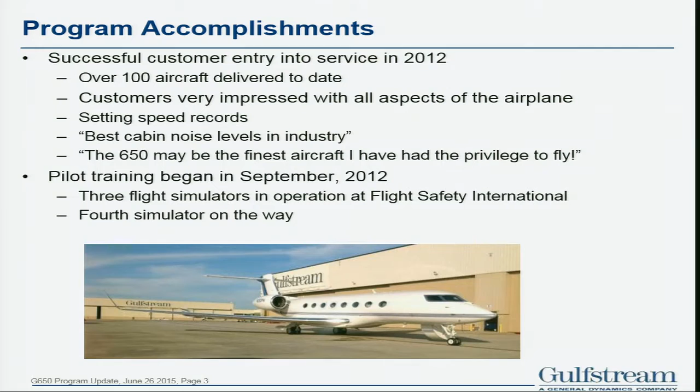Also, for pilot training, we worked with FlightSafety. We have 3 simulators already built. The 4th one's on the way, and actually we're looking at a 5th one now over in the UK. So quite a bit of action going on with simulated training for the 650.

So let's talk about the highlights of the airplane. Design: let me first say that Gulfstream itself has never built a new airplane. The last new TC airplane was built by Grumman Aerospace, called the G2. Every other airplane since the G2 has been a derivative of the G2, including the G5, the 550, the 450; they're all derivatives of the G2. So when we started the 650, this was the first new jet that Gulfstream itself had designed.

So our first rule was we're going to design the whole airplane in 3D in CATIA V5. And then we looked for the longest range airplane possible at highest speeds. So we looked at 7,000 miles at .85 and 6,000 miles at .90. Keep the empty weight of the airplane at 54,000 pounds, max takeoff weight of 100,000 pounds. And then we worked cabin noise. We wanted dB levels below 50, cruising at higher speeds. We'll talk about that later.

We got a provisional type cert in November of '11, and then we got our certification on September 7th of 2012. So we started delivering airplanes actually in November to customers that year. Field performance, the plane handles spectacularly. We'll talk about that a little bit. And one of the things we did when we decided to build this airplane is we wanted half the parts in this airplane that are in the 550. And we met that objective, which is pretty important.

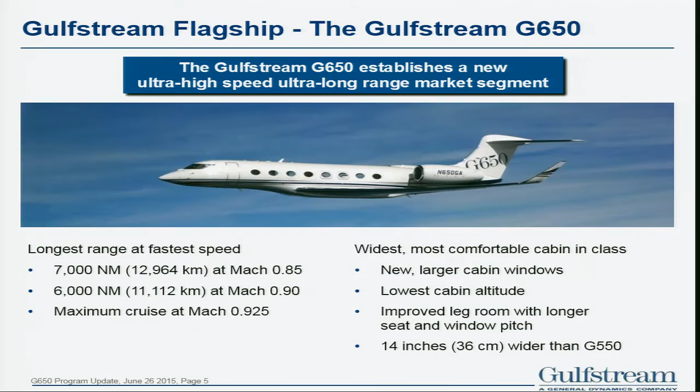In addition, we've pitched the windows out. We spread them out to give us more seat pitch. And then, first time ever, we've changed the fuselage at Gulfstream. We actually widened the fuselage 14 inches. So it was a big change for us there.

We refer to this as a walk-around chart, what we've done to the airplane. For the first time ever, we introduced a 3-axis fly-by-wire system with a fully electronic backup. We're the first business aircraft to certify a fully electronic backup system. Also, we put some more composites in the airplane. The horizontal is a drooped composite horizontal surface, spars and covers. We went with new engines. We picked a Rolls-Royce BR725, and I have a slide on engine development.

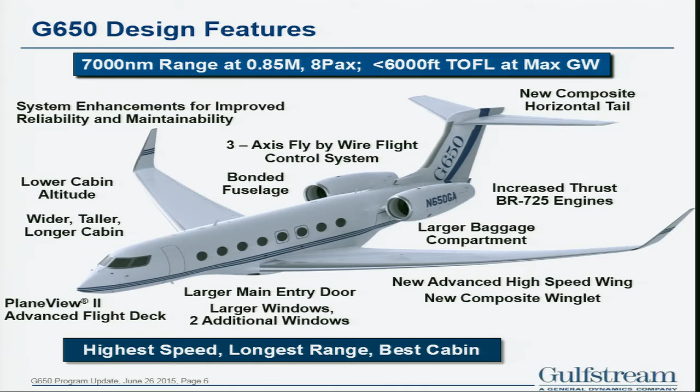We increased the baggage compartment size. We put a whole new wing on the airplane, a whole new cockpit, a whole new entry door. In general, we have basically a whole new airplane, but it didn't start this way when we got it out of PD. I hate to say that, but we changed everything on the airplane during development and didn't get any budget or any schedule as a result of that, which was kind of interesting, but challenging.

What is speed today? What does it mean to cruise between .80 and .85 on a long-range mission? It will save you an hour in the airplane. That's a big deal. We talk to customers all the time. Customers helped design this airplane. We got their feedback, and every one of them talks about speed. Speed is everything. And that's why, when we look at how they're using the airplane today, most customers are cruising at Mach .90.

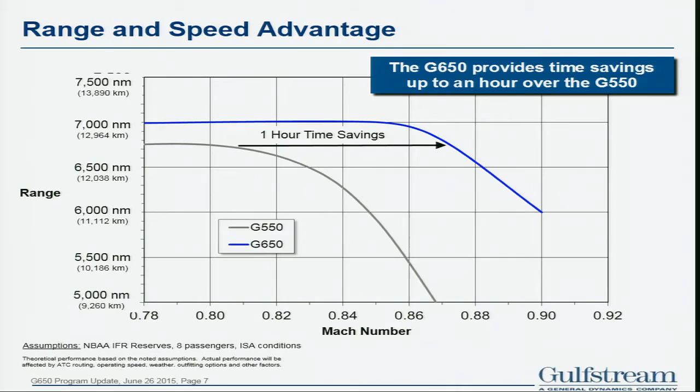Wind tunnels. We spent a lot of time in the wind tunnel, and we went to 9 different tunnels. We spent over 1,400 hours validating the design, the performance, and the handling characteristics of the airplane. We went all over, from Boeing to ETW and NASA, over to the Netherlands, over to Germany for the cryo testing.

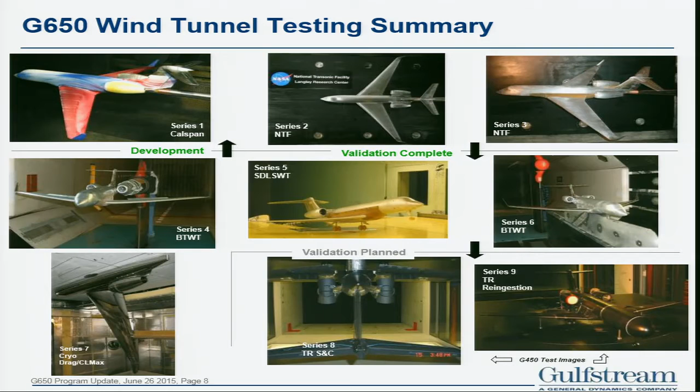Quite a bit of testing was done. The highlight of this is we also performed a lot of CFD on this airplane, thousands of hours in CFD. And what's amazing, what we learned is the engineers did a great job. The CFD predictions matched what was in the tunnel. There was nothing there that was different, which was a tribute to the engineering. I mean, it was amazing how close the CFD matched the wind tunnel testing.

And here's just a little breakdown of what each test was, and if you want to ask questions, we can talk about those, but this is what we did in each wind tunnel. On the G5, though, we did spend almost 1,600 hours in the tunnel. So you can see we spent a little less time than the G5, but we got great results.

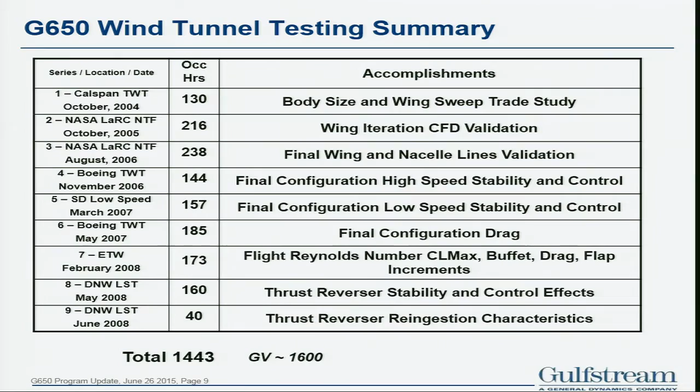Talk about the airplane systems. In Savannah, we have 14,000 people now working for Gulfstream. We've built a campus for engineering. Basically, we have 4 research design centers. We have labs. There's about 1,200 engineers in these labs doing design of the new products.

We also built an acoustic chamber. Interestingly enough, that was critical for us to get our cabin noise down. And to support that, we have a great parent company called General Dynamics. We did hire some of the acoustic engineers from the submarine division. As you know, they're very acute for noise, so we hired them, and we learned an awful lot about the cabin. Well, I'll show you a cabin slide.

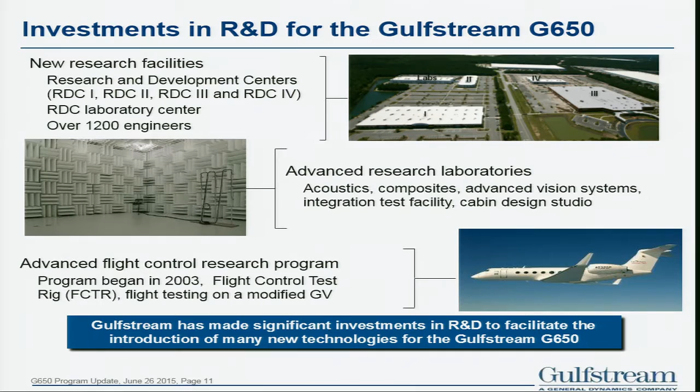So since we've never done fly-by-wire in Savannah, we also built a demonstrator airplane and put a fly-by-wire system in it. And we flew around for about 2 years experimenting with fly-by-wire so we can get familiar with certifying an airplane with fly-by-wire.

The engines, Rolls-Royce engines, 16,900 pounds of thrust, a lot more takeoff thrust than we had on the 550. It's very fuel efficient. It's got a good carbon footprint. The NOx levels are much lower. It's much quieter. Its flyover noise is half the flyover noise of a 550, to give you an idea on the 650 on community flyover noise.

So Rolls, I have to say, did an outstanding job. They beat the SFC guarantee that they signed up for, and the engines each came in 100 pounds underweight. So my hat off to Rolls-Royce in that program, they did an outstanding job developing that engine.

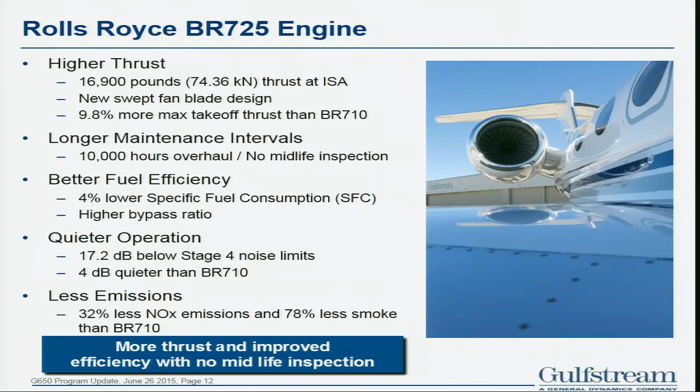The cockpit, we have PlaneView 2 in this airplane. Basically, we have 4 screens, 14-inch DU displays up front. It has EVS and synthetic vision, which are standard with the heads-up display. We put in a multifunctional standby controller, which is your standby instrument, but it also can be used for other commands inside the cockpit. So that's a first for us.

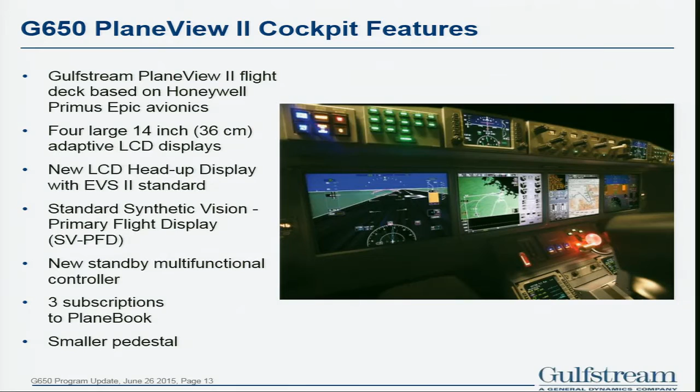And then, of course, we don't have manuals at all in the airplane. Everything's done through PlaneBook. We give 3 in the airplane. They have power outlets. And as a result of fly-by-wire, the pedestal was greatly reduced inside the airplane, giving more room to the pilots. Here's a picture of the cockpit today. You can see the HUD, the 4 displays.

Talk about enhanced vision systems. With EVS, it allows us to see through small particles of fog and rain. We can make a decision at 100 feet. And interestingly, you notice the bump on the upper nose of the 650, and on the 550 and 450, the bumps are on the bottom of the airplane where we have the EVS. It's not there because of parallax.

The bump was put on the top of the 650 because when you hit a cruise speed of about Mach 0.90, you get a shock wave if the bump was on the bottom, and it would hit the landing gear doors. So when we originally started with this airplane, that bump was on the bottom, but when we went in the wind tunnel and saw the speeds we were seeing, we moved it back up top because we were getting a big bump on the landing gear doors. So anyway, the drag rise was huge.

In addition, we have HUD. The HUD's a pretty neat system. It comes down, we have all the instruments on it, and then the EVS system display is displayed on the HUD, and it's also displayed on the DU, so the pilots see both.

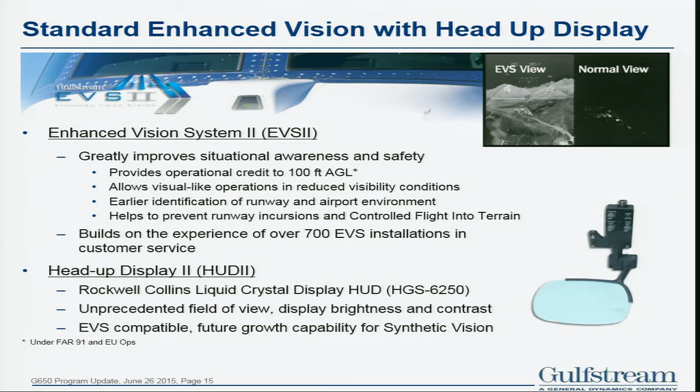As we go through development, and software is driving basically everything in the airplane today, we built what we call an integrated test facility. It's a stationary simulator where we take all the components and software coming in from the various suppliers, from the flight control computer from Thales, the cockpit from Honeywell, to the REUs from Parker Aerospace, and we integrate that in. It's a motionless simulator, and we can do all the software integration there at Gulfstream, and that is called our integrated test facility.

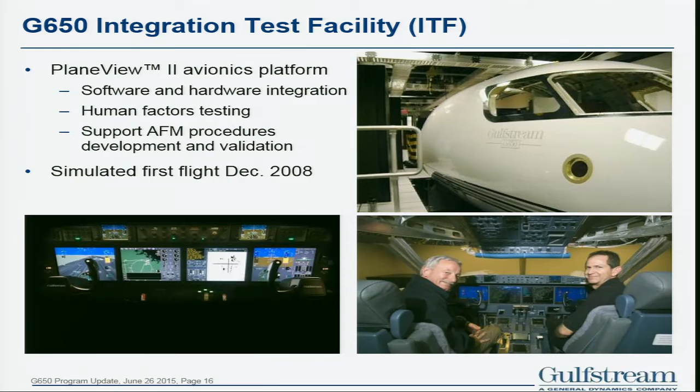Talk about the flight control system. We spent a lot of time on it, and to us it was the highest risk on the whole development side of the program. It turned out much better than we wanted, but we spent a lot of time and focus on it. When the FAA flew it during development testing and certification, we had to go into full electrical

backup mode, and the pilot, Clark, he's retired, but he came back and said he didn't even know he was in backup mode. It felt like he had full authority like he was in normal mode. So the flight control system went extremely well during this development program.

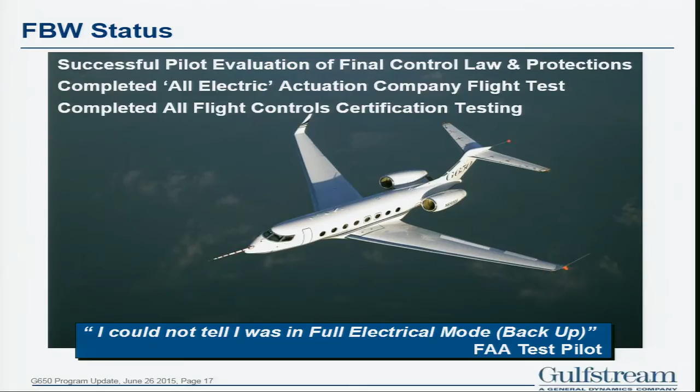So this is what we use to integrate and validate the fly-by-wire system. We spent literally about 20,000 hours on the Iron Bird before we got certification.

So what are the benefits of fly-by-wire? Because when we originally started the 650, from the day we started in May, it was not a fly-by-wire airplane. As we got through the regulations, we looked at what we had to change to go to fly-by-wire. But what were the benefits as we went into it?

Obviously, handling qualities. You can tune the system. We tune the airplane basically to the owner's seat, so he has the smoothest ride in the airplane. You can actually tune the controls to do that, for gust loads. It keeps you out of areas, it has envelope protection, which is fantastic.

From maintainability, when we want to rig the flight controls, we push one button and it does an auto rig based on the sensors. And it does have a marginal weight savings. You get into back and forth because you've got to put a RAT in the airplane and you have to put battery backup. But it does have a marginal weight savings.

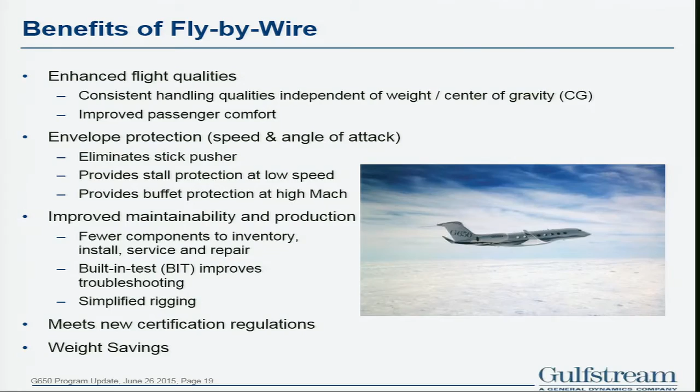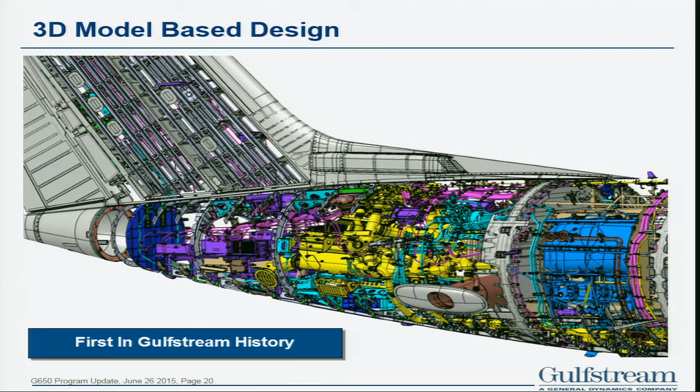Like I've told you, we changed the fuselage for the first time. We did it in three-dimensional CATIA V5. To be frank, we made our senior managers at Gulfstream very nervous. This was a quantum leap for us. So what we did was, from a manufacturing standpoint, we built the test barrel section. And that's a picture of it right there.

And when we looked at building this airplane, not only did we want half the parts, we wanted to build it in half the time it took to build the 550. So we made a significant investment in how we incorporated manufacturing technologies. We used bonded panels with stringers for the first time for us at Gulfstream.

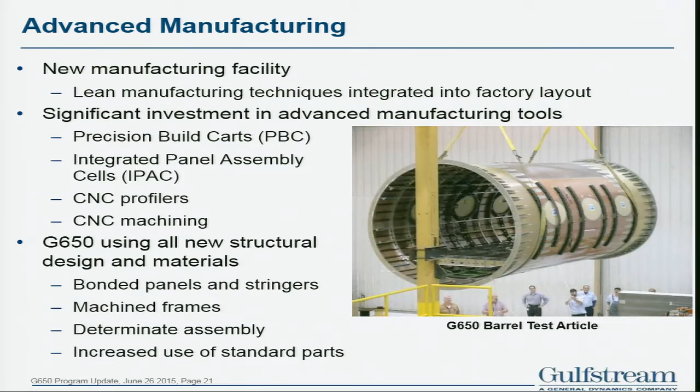Never did that before. We used the design method called determinate assembly, meaning in manufacturing they couldn't put a part in the wrong place. It had to fit perfectly, or it wouldn't go in. And then we took all the parts we had at Gulfstream to do with rivets and bolts, reduced the part count by about 50%, and they had to use standard parts throughout the build of the airplane. So it was a big success. And then we actually did a pressure test on this vessel, and it worked very well.

We also prototyped the nose. This nose we built way ahead of the first airplane. And this nose went in the ITF that I showed you a picture of earlier, and it went very, very well. Once again, to validate the manufacturing technology and the engineering design in 3D.

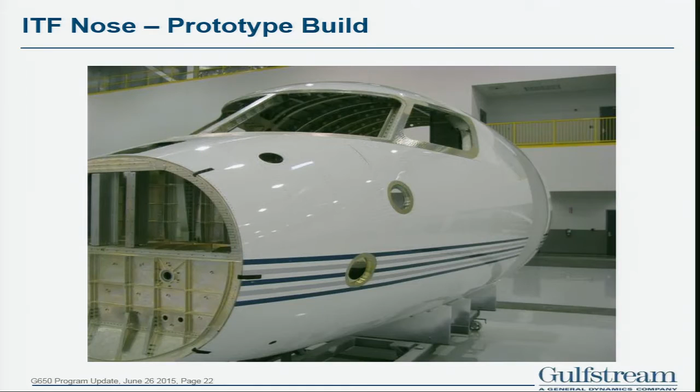Our manufacturing facility, the 650 manufacturing facility, got the code name Building X during development. It's now called the Nick Chabraja 650 Manufacturing Center. And it is the building, you'll see, that's kind of cocked a little bit to the side.

Let me tell you how things go when you develop a program. That building is not supposed to be crooked like that. It was originally straight. And although we received all the permits from the Savannah Airport and the FAA and everything, it turns out at the last minute they came back and told us, after we had almost started construction, that the tower could not see the end of the runway because the building was blocking it.

So we had to cock the building a little bit so the tower could see the end of the runway to the right. It's kind of a little last-minute thing, but thank God it worked out. We scrambled at the last minute to make that manufacturing center fit in that footprint.

Unique to Gulfstream, our wingspan from tip to tip is 100 feet. So we basically have almost a 50-foot panel on each side of the airplane. We do not splice our upper covers at Gulfstream, and the reason is when our owners and passengers look out their windows, they see the upper cover. It is one continuous piece of aluminum.

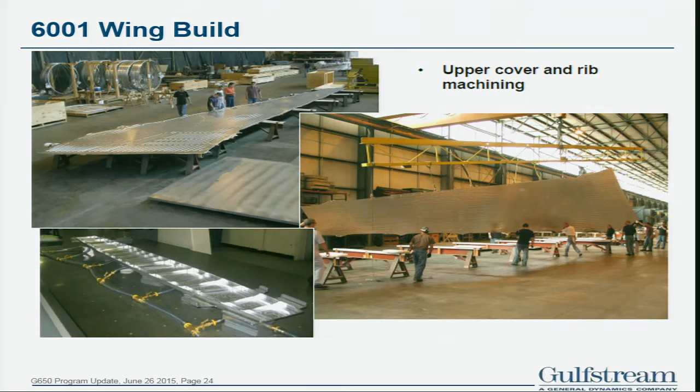It is the largest sheet that Alcoa makes, and you can see the size of it. The lower cover we do splice, but the upper covers on every Gulfstream from the G1 through the G6 all are one piece. So we took the limit and made a one-piece upper cover.

This is 6001's first bonded panel. It's made by Fokker over in the Netherlands in Papendrecht. And that's the Fokker team putting the panels together. You can see the bonded stringers. You can see the bonded doublers. The only thing that gets riveted on will be the frames, and we'll do that in Savannah. In the video, you see some pictures of that.

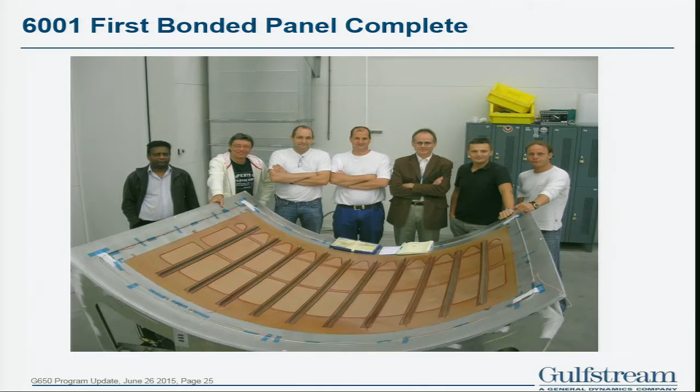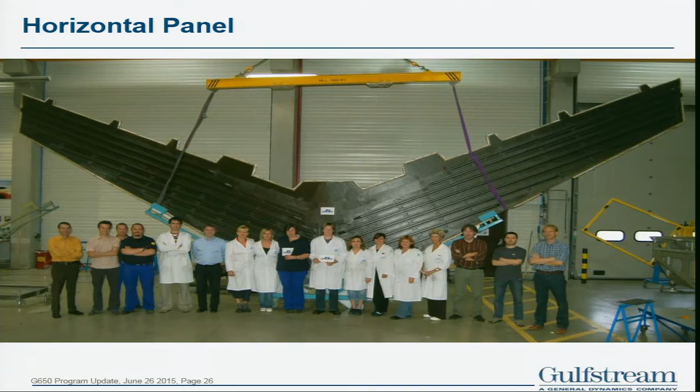And this is the horizontal skin. This is also made by Fokker. It's actually a joint venture with them in SABCA. It's made in Belgium. And it's been very, very efficient. It actually has a droop to it.

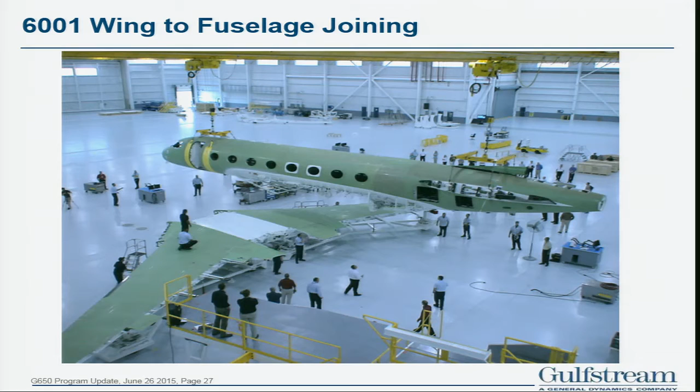6001, this is the first airplane. We call this T1, 6001. It's still in the Gulfstream livery. We use it in flight tests till today. Interestingly enough, this is the fuselage mating with the wing. We can mate this fuselage to the wing in less than 45 minutes. It has about 12 fasteners that attach the wing to the fuselage. It's still redundant, but doesn't take very long at all to mate the airplane together.

And then the tail comes on. The tail takes about 30 minutes to mount. The engines take about 20 minutes to mount. The landing gear takes about 25. It's like watching Legos go together. And most of that's attributed to the CATIA V5 and the Enovia systems that we worked in.

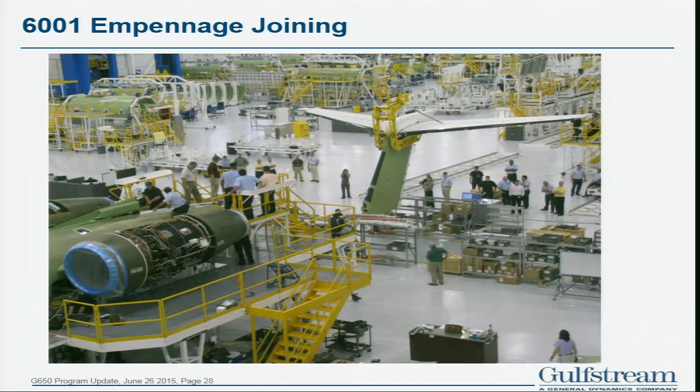And lastly, on our airplane, our leading edges on the 650 are different than any other Gulfstream we built. All the other leading edges we have, if you're all material people in here, the 450, 550, the G4 to G5, are all made with 2024 with a high polished clad surface. It's the number one warranty issue on those airplanes because our customers always polish their leading edges and the clad wears off and doesn't look good. So on the 650, we went to bare aluminum 6061-T6.

It's a softer aluminum. So this is an example of a bird strike test. We shoot the bird to make sure it doesn't penetrate the front spar and cause fuel leaks, and you can see the bird gun to the right there, and we shot the bird into the leading edge, and it worked out pretty well. We're pretty thankful.

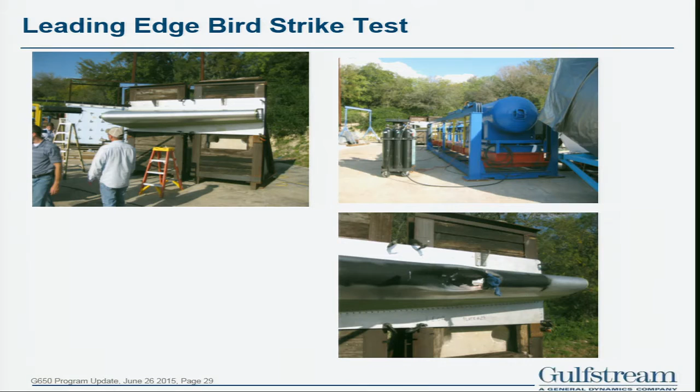We treated water, waste, lighting, power, and cabin entertainment all without a single point failure to a 10 to the -7 probability of failure. Pretty interesting to do. So what you end up doing is you have redundant systems. Like we have 2 water tanks, we have 2 lavatories, but we termed it Cabin Essential, and it's actually worked out pretty well.

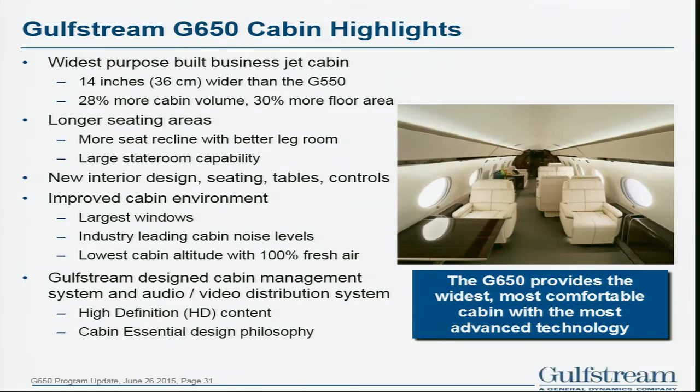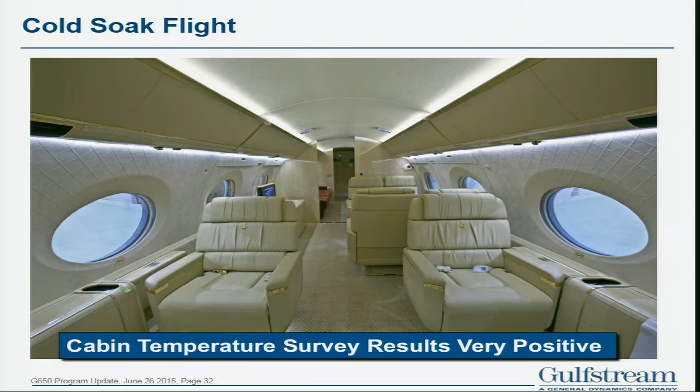Here's a picture of the cabin. On every green airplane and every completed airplane, we do what we call a cold soak flight. As you get up to about 48,000 feet, the temperature changes, and you sit up there for about 6 hours. Some funny things happen with expansion in the airplane. So we do cold soak flights, we do temperature surveys, we check for fits and gaps, and here's an example of an interior on a cold soak flight with positive results that we got back on the cabin temperatures too.

I talked about windows. We had the biggest windows in the industry on the 550 and the 450. We talked to our customers. Our customers said, we love windows, can you make them any bigger? And they also said, hey, listen, when I sit in my seat, I have to droop and look down out the window. I don't like drooping, can you raise the window up?

So you can see the biggest change, what we did on the 650. We raised the windows up 3.5 inches, made them bigger. And as everybody knows, when you put a big hole in an airplane, you have to reinforce it. It costs a lot of weight, and also to make the window bigger, these windows are not cheap either. So it worked out very well. Customers love the windows, the natural lighting that happens in the airplane.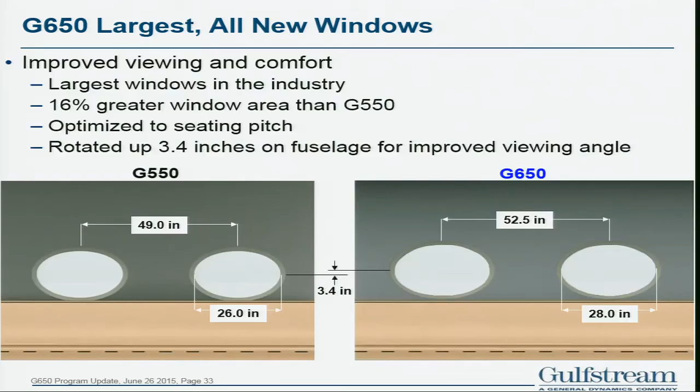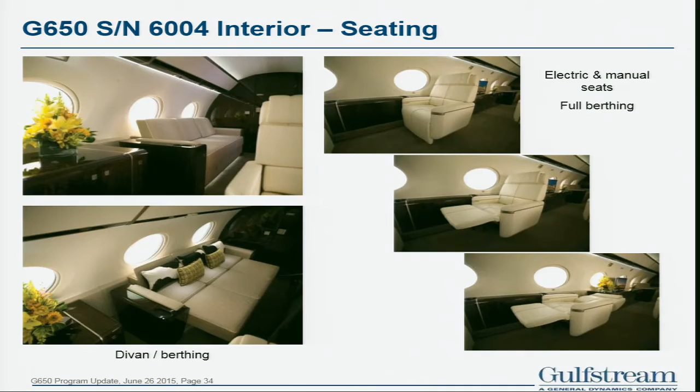Here's a picture of the seating. We have electric seats in the airplane, certified. It's the first in the industry for us. And then also you'll notice that everything fully berths. We have touch controls. We have an app you can load on your Droid or on your Apple. You can raise window shades, do your lighting, change your gasper.

Everything's touch screen inside. And like I said, you can take your own personal phone and load the app, and the owners and operators can come in the airplane and change anything they want in the airplane from lighting. They can change the color lighting. It's all integrated.

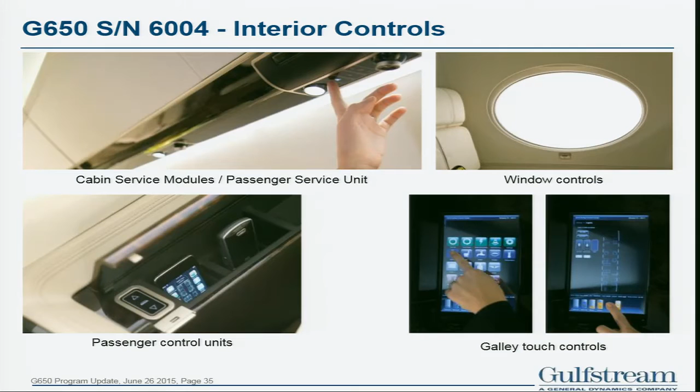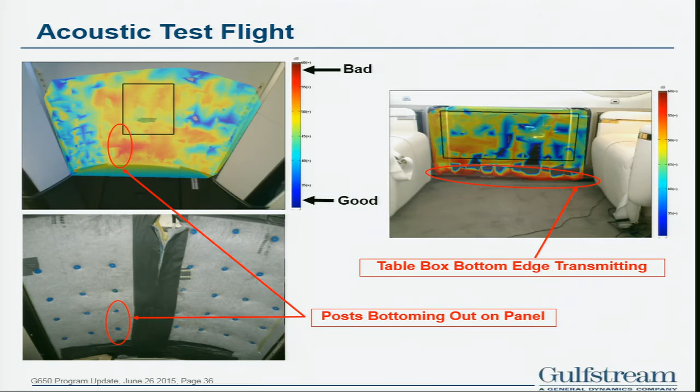So when we bring the plane down to the ground, we then take the panel back and see what's going on. And in this case, you can see we have the insulation, and we use these studs to hold the insulation up, and the stud was actually hitting the panel, causing the noise. And this one here is a table box. The table box also is the same thing. We noticed that it had some clashes inside that you wouldn't see normally. So we paid a lot of attention to acoustics in this airplane with insulation and noise.

The fun part, testing, always fun. Exciting, but from my perspective, it's the best part of the program. The only thing I will tell everybody, during development, you have a set schedule and time. When you get to testing and you find an issue, you have no time. It's 24/7, find a solution, get it back.

And although you think everything's going to go smooth, everybody's going to run into something that they got to tweak or do. So you can't let the asset sit on the ground for very long. You want to get in the air, but you want to operate safe. So even though it's fun, it does become a very stressful time for everybody. This is where you validate everything you worked on.

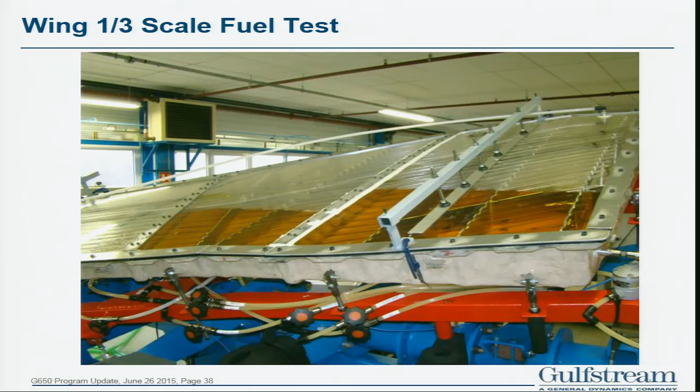So we also do lab testing. This is the wing. This is done in France, outside Paris, by a company, Intertechnique. Since it's the first time we've used their fuel system in Gulfstream, we actually built the third scale test article and did different altitudes and attitudes of flight to determine how the probes could read. So we did a little bit of testing there before we went and flew the airplane.

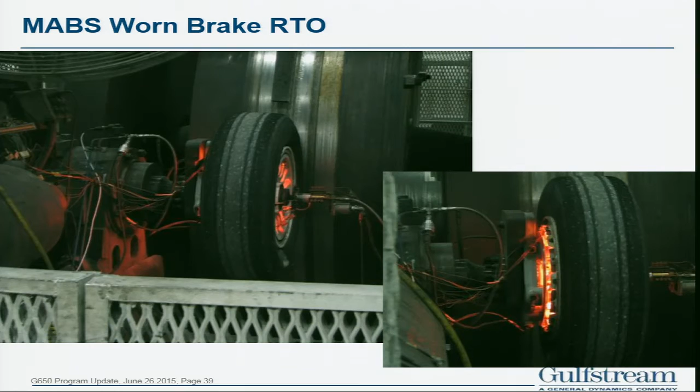Also MABS, aircraft braking system, up in Akron, Ohio. We do a lot of testing. This is their dyno test. We do a worn brake test, and you can see how hot the brakes get. You take it to the limit and determine the stopping distance and what temperatures the brakes can take. So that went very well too. And actually, we do a real test on the airplane in Roswell to do max kinetic energy braking.

Rolls-Royce, and this is in Dahlewitz, Germany, right outside Berlin. They built 5 test engines. You call them EDPs, engine development test engines. And we had them all over the United States. We had them all over Europe. We had them in England. They used 5 different test engines. Went very, very well. And you'll see some more engine stuff. But Rolls did an outstanding job with the development of test engines.

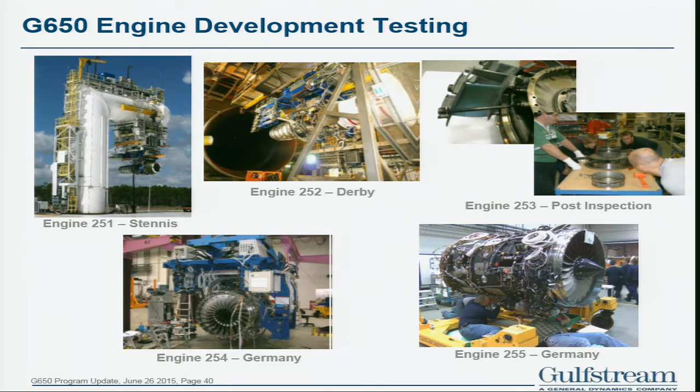All right, now, wing. The wing in the 650 is amazing. And I'll start by saying that I knew this statistic before we did this test, and this will make you nervous. 50% of all new wings break before they get to ultimate load. 1 out of every 2. It's pretty scary. So this is a nervous part of the program, and you're going to see how much this wing moves. And thank God we passed. Otherwise, we would have been in big trouble. So, 50% of all new wings do fail.

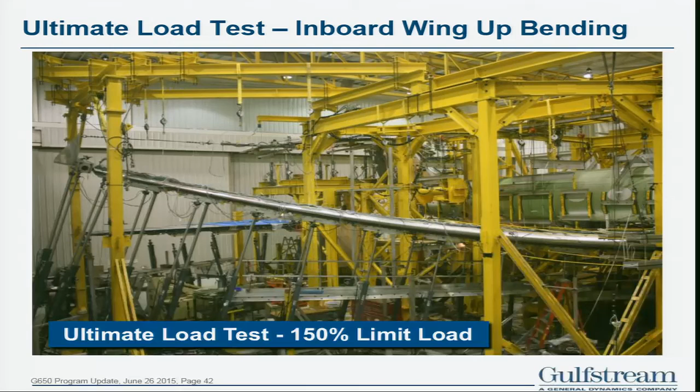It's a known statistic. We also have a fatigue article going on. It's actually right now being tested. We've passed 2 lives. We're going to 3 lives. The regs actually take you to 2.5, but Gulfstream, we're taking it to 3. And that is going on as we speak today. Should be done by the end of this year.

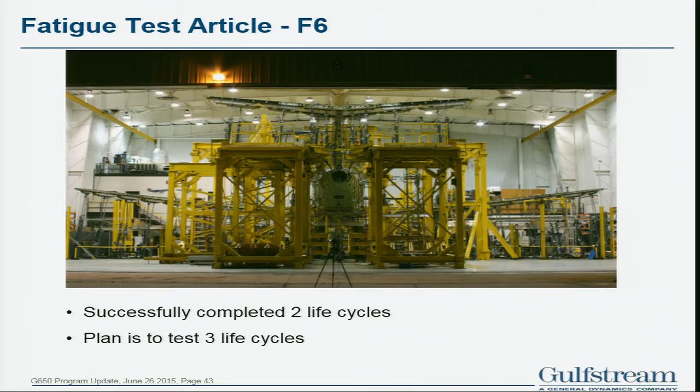And before we fly, we've got to do a lot of testing on the airplane. One of the first things we do is we call a GVT, ground vibrational test. Although we do a lot of modeling, and the engineers did a great job, the FAA still requires us to go ahead and do a GVT, and we want to do a GVT. And you can see we put shakers on the airplane, and we measure the vibration levels of the airplane.

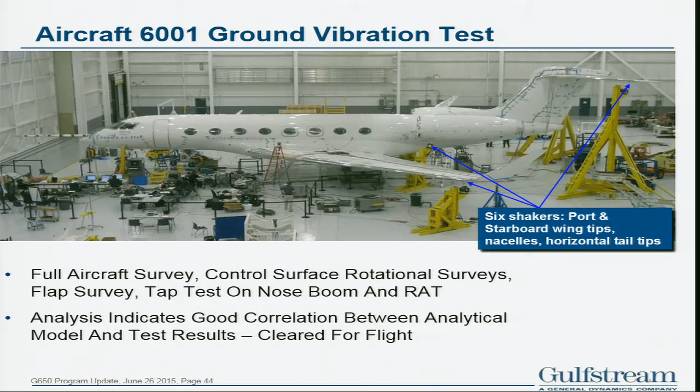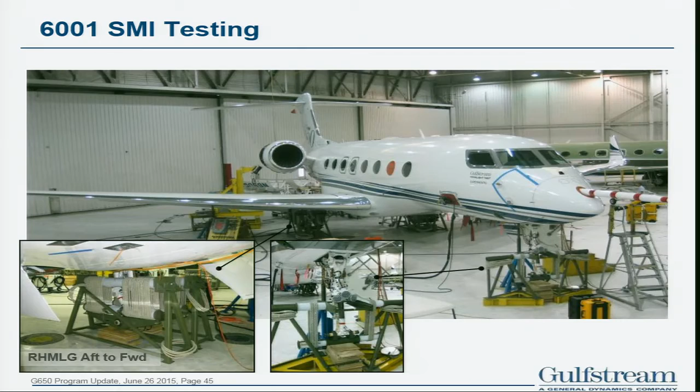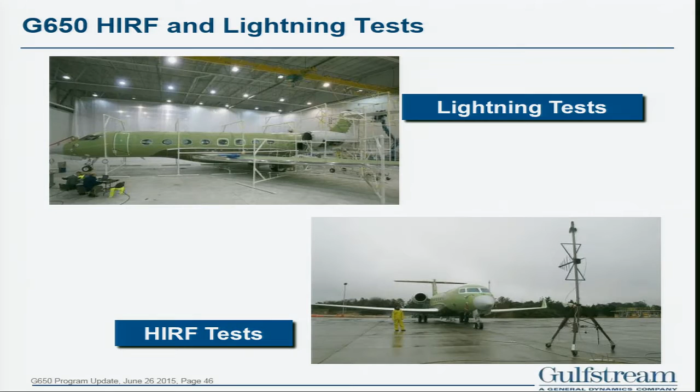Also, not only do a GVT, we do a structural mode interaction test too to see how the plane reacts in the structural modes. And you can see we put the plane on bungees, and we simulate the structural mode interaction of the airplane. Pretty exciting test. And on top of that, we do HIRF and lightning test. This is 6005, going through HIRF and lightning testing, validating the wiring, the systems, separation, and how the airplane handles HIRF and lightning.

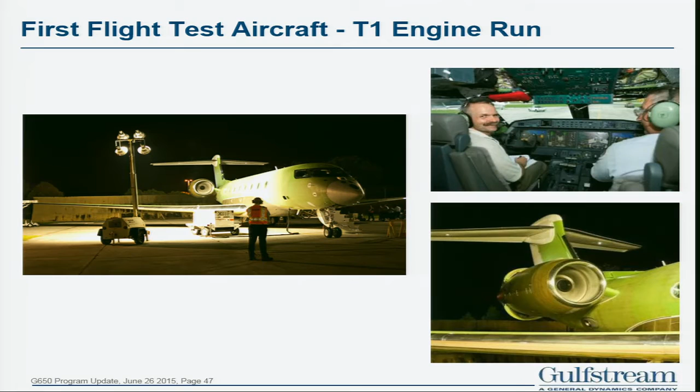And then back in September, this is our first engine run on the first test article. That's about 11:30 at night. We ended up taking a lot longer than we wanted to because we were being very cautious. But there's Jake Howard, our chief test pilot, firing up the first engines, which was a very, very big moment for us.

I'm not sure how many of you have all been in flight test and what goes on. We normally have about 5 airplanes in a flight test program. Each airplane has its own special mission. Number 6001 gets instrumented for performance. Then 6002 and 3 are our systems airplanes. 6004 does our F&R flying and does basically interior stuff and cockpit stuff with 3. And then we have 6005 that picks up the cats and dogs, stuff we can't get.

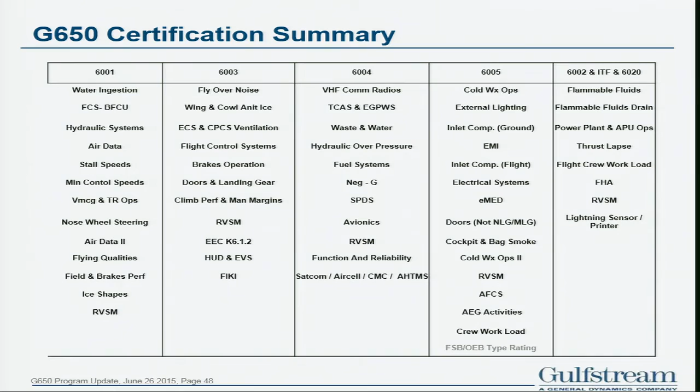You'll notice RVSM is on the airplane. The FAA requires us to certify RVSM. We have to have a sample of 5 and show that the variations aren't much. But we break down each test that's required for certification onto each airplane. And as a result, each airplane is instrumented to handle that test.

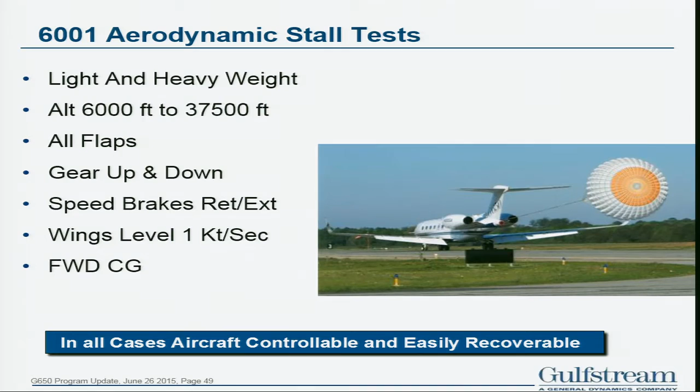6001 is our performance airplane. It did our stall testing. You can see here it's testing the chute on the ground. Thank God we never had to deploy it, but you can see it doing testing. Handled very, very well. I have a slide to show you how it stalls. That is doing basically lightweight, low speed, take it up, an angle of attack, watch the airplane come and recover itself out of stall.

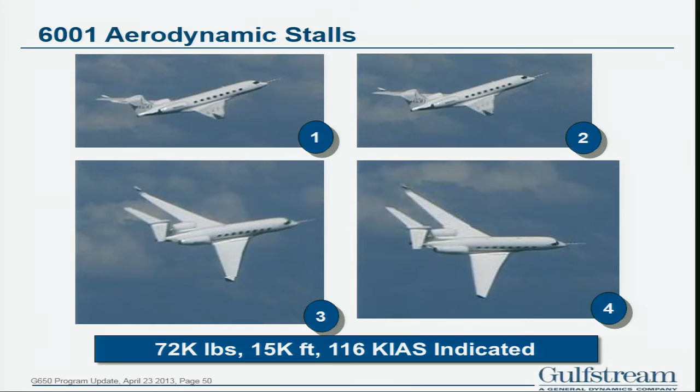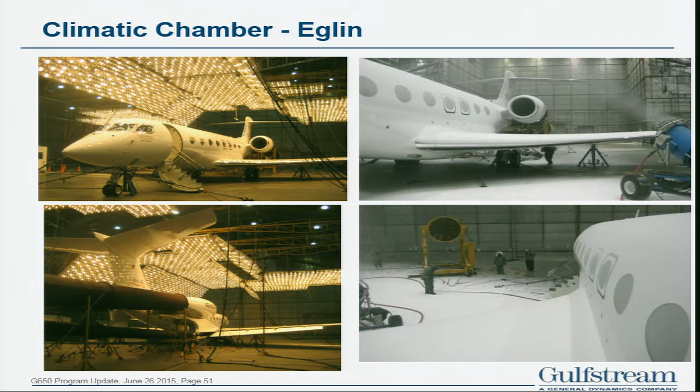Climatic testing. I got quite a few slides on climatic testing. Over to your left, you'll see the world's biggest tanning bed. It's in Eglin Air Force Base where we can take temperatures up to about 140 degrees. In the same hangar, we can also make it snow. So they have a great chamber at Eglin Air Force Base down in Florida. That's where we took our airplane to do some climatic testing. And here's the team right there with the Gulfstream Rolls-Royce and the flight test team with 6002 going through climatic temperature testing.

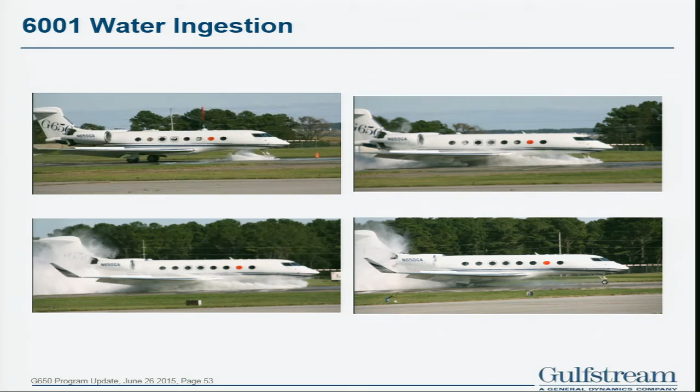Also, another test we do, we did this at Wallops Island. This is called the water ingestion test. You want to make sure how the plane handles. Basically, put about 2 inches of standing water on the runway, and you land and you put the plane through it to see how it handles water ingestion. And you can see the plume of the water coming up from the nose, goes to the back. There's another one here. And you can see the best part, it doesn't really get any water ingestion in the engines. And we successfully passed that water ingestion testing.

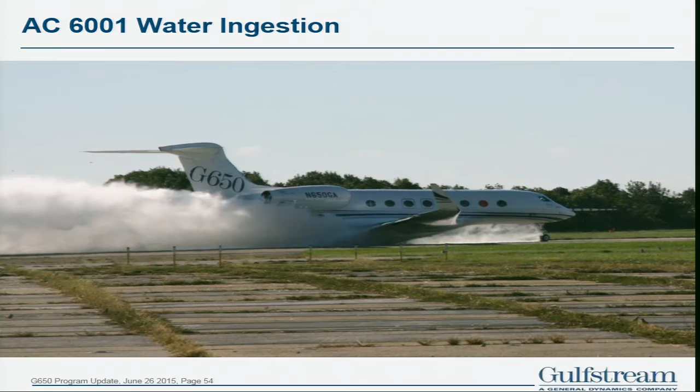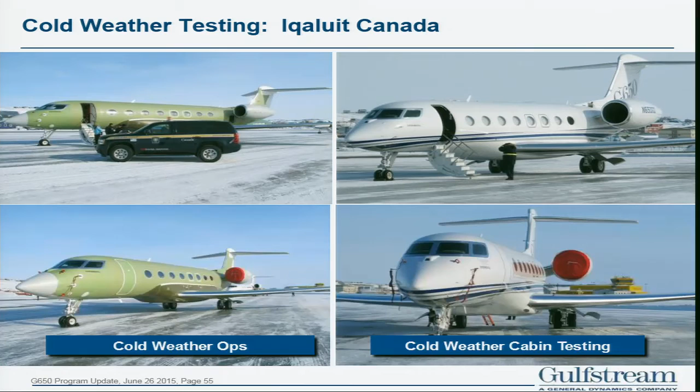Also, we went up to Canada. Unfortunately, on this test, we took 2 airplanes up there, to test the cabin and also test the green airplane. And we only got to minus 20 degrees. But testing proved to be valid. We learned a few things, but the FAA requires you to get to minus 35 degrees Fahrenheit. So we didn't get cert credit for going up there, but we got a lot of company credit, and we learned a lot of things.

Icing. Since it's a new airplane, a new wing, a new tail, we worry about how it performs with ice accumulation. And I'll spend a little time on this because from an aerodynamic standpoint, it's pretty important. You can see how we simulate the shapes. First, of course, we model it through CFD and we look for the separations. But also then we actually put simulated ice shapes on the airplane, and we build them up and we fly.

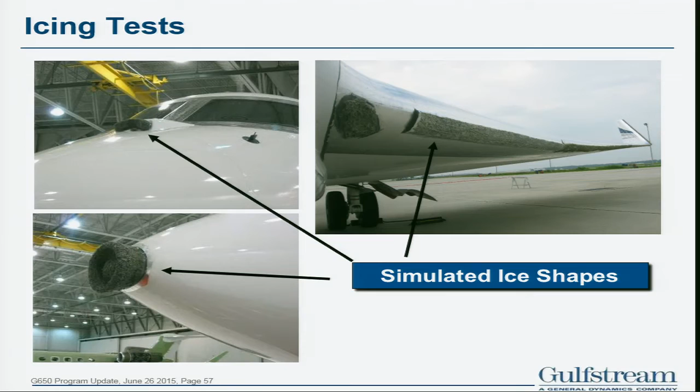We build them up and we fly till we get to where we think it's at. And we build them up for safety reasons. We want to make sure that although we have the analysis that says it's okay, we want to validate it. And interestingly enough, what we build the shapes up with is basically an epoxy glue with kitty litter to give you the roughness of ice. And we spent a lot of time. This test takes literally about a month to go through by the time you do all your build-ups to give you confidence. And you can see it's on the winglet with different ice shapes and how much holding time you need.

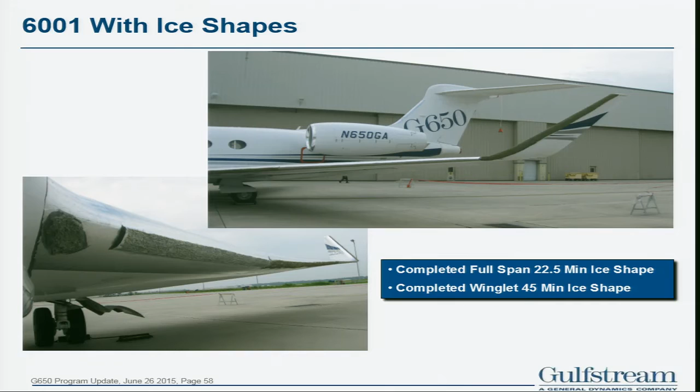Anyway, when you get through with all that company testing, now you got to go find ice. And we were running late in the program, behind schedule a little bit. And finally it was in May. And we were once again nervous. We were running out of cold weather. We ended up going up with the FAA to Bangor, Maine, and performing some icing testing. We're looking for natural ice. That's how you have to certify the airplane.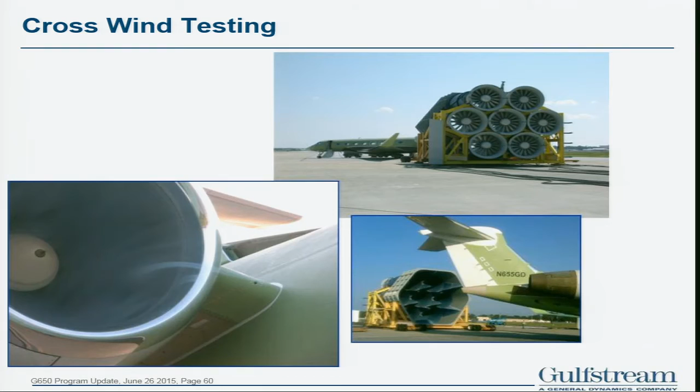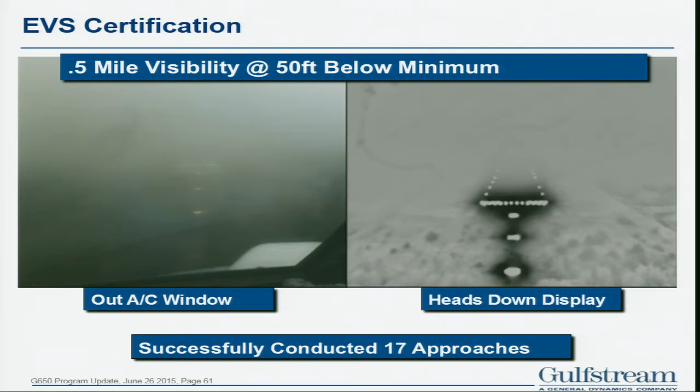I talked about EVS certification. We see through small particles of fog and rain. You can see what it looks like on half-mile visibility. This was taken at about 50 feet. You can see the left is natural, what you see, and to the right you can actually see the runway through EVS. We did 17 approaches like that. Worked very well.

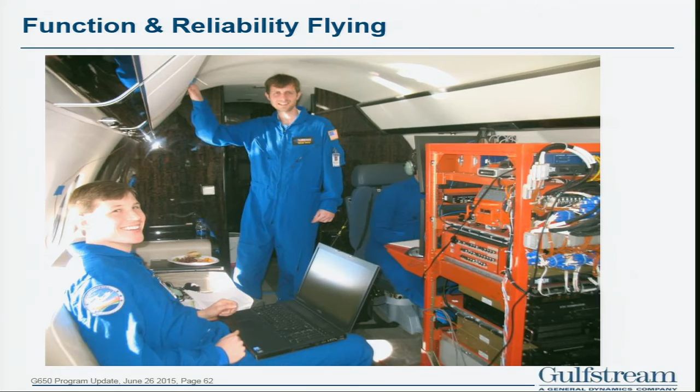Some of the flight test guys worked on functional reliability. When you do a new certification, even after you pass all the critical testing from the FAA, which we call TIA testing, the FAA then requires you to fly about 300 just normal flight hours to prove how functional and reliable the airplane is. So we fly around with the FAA aboard for 300 hours after we finish all certification testing to validate the airplane is functional and reliable. And you can see the orange rack in there, it's a flight test rack.

We spend a lot working with airplanes, and one of the beauties of CATIA 3D is what engineering can do with that data when you give it to the pubs people. We have interactive manuals on the 650, first time we did that, that actually illustrate pulling parts out, putting parts in. They can click on it, it's intuitive, it knows the part number, it tells you what it is. It's a pretty smart system. It's the first time we've really taken a step up in how we handle manuals and pubs, especially from a maintenance standpoint, and the FAA just loved that. We went through MSG3 smooth on this program.

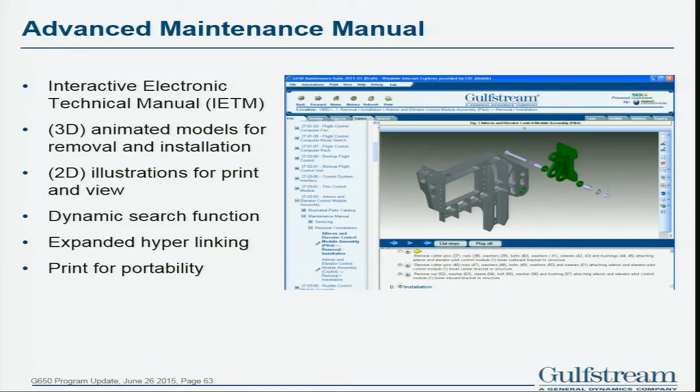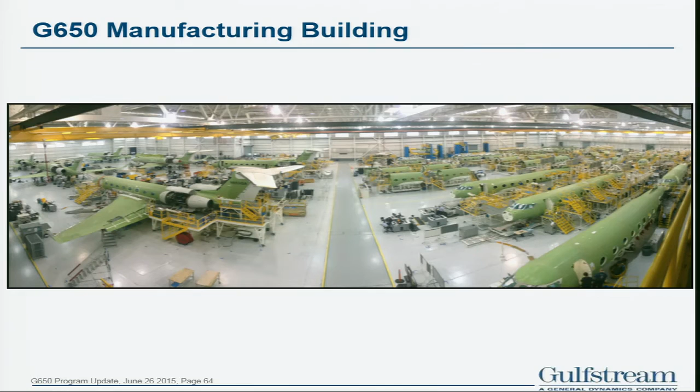All right, so some people ask me about aircraft development. It's like a marathon race, and it's difficult, I'll be the first to tell you, but it can be fun at the same time, as challenging as it may be. And my advice to everybody is, and it's very hard, you want to listen to customers. We all think we know what we're doing and we know what's right, but when you get a hold of the customers and they talk to you, they will damage your ego, and they have a right to. And you've got to listen and be humble, and then you've got to act on it. So it's very important. I tell everybody, listen to the customer.

Also, listen to the airplane. The airplane will talk to you during flight tests. You'll see things going on. Just pay attention, listen. The schedule, I can't emphasize enough how critical schedules are. When you develop these schedules, be very, very critical. Spend a lot of time going through the schedule. Go through what-ifs, look at what you did in the past. Literally on the 650, I probably spent 3 months working just on the schedule before we launched. So I urge everybody, focus on the schedule.

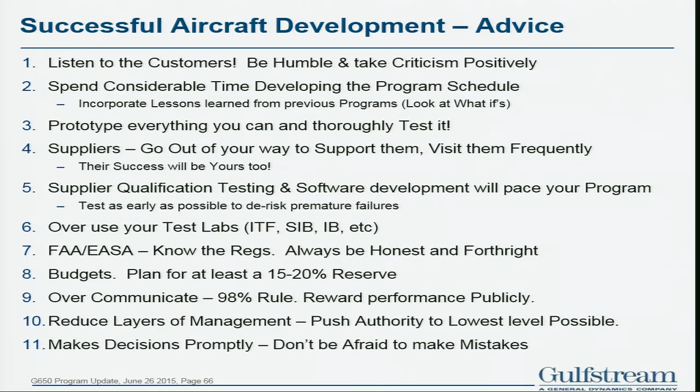Don't be afraid to make mistakes. Everybody makes mistakes. I make mistakes every day. I made a mistake pulling into the parking lot here today. So just don't be afraid to make mistakes. Just don't make the same mistake twice. But don't be afraid. You'll be better off.

So in summary, talk to the customers, get their input. It's critical. Engineering, I can't say enough. Fantastic. Their analysis, how well it correlated to everything in the test, was unprecedented for me. I've never seen anything work so well. The airplane does have 50% fewer parts than the 550. The labs are where I think it saved us on this program. The labs were critical in the development of the 650.

We're very, very honored to receive the Collier Award. That was a blessing, and we're so thankful at Gulfstream to have that. The plane is well received in the marketplace. Right now, I think the next available slot for a 650 is the fourth quarter of 2017. It's $65 million. That's pretty good in this day and age.

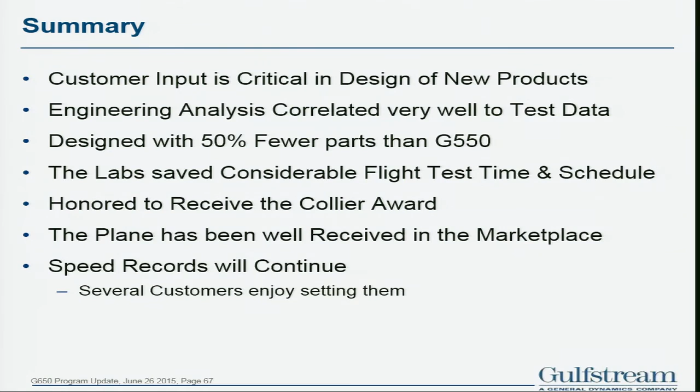And the beauty about this airplane is it's not done. There's still more development going on in the 650. Obviously, you heard about the ER. There's other stuff coming in this airplane. Speed records will continue, and the best part about the speed records is our customers love to set them. So it's pretty exciting. So with that, I just want to show you our Collier acceptance video, if that's okay.